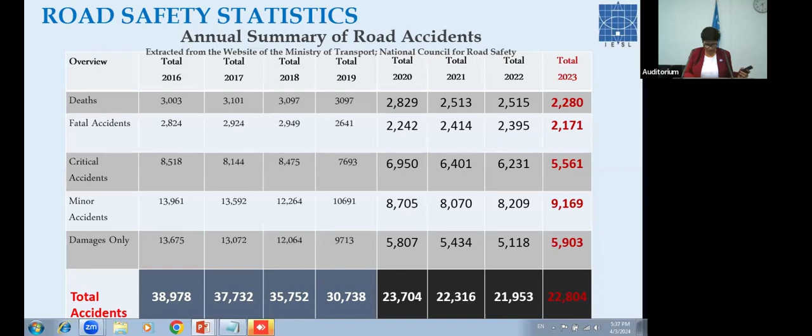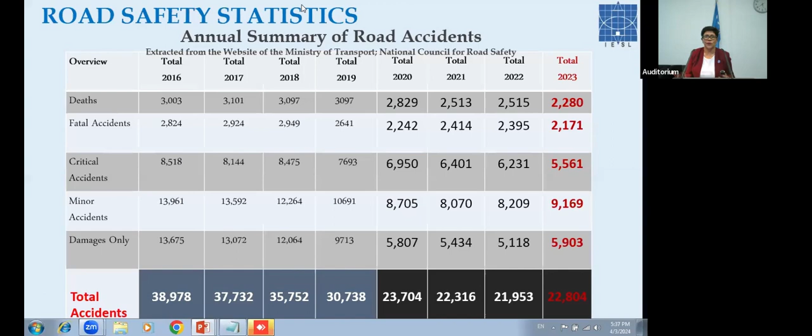And from 20 to 22, it's really because of maybe the vulnerable and the COVID and this pandemic situation. But with that, what I want to say is, still in last year, 2023, this figure has increased by another 1,000, so that is not to be expected. Sometimes I thought this credit has to go to the road users, because maybe because of their discipline, they are knowing about the road rules and their behavior patterns. I don't know why I'm doing something from here, sorry.

If I go to the next slide, you can see the number of persons killed in road accidents. That also I have taken from 2019 up to 23. You can see motorcyclists are the most vulnerable road users, those who are affected with these fatalities. And next, pedestrians and the passengers. So what I'm highlighting here is, looking at these figures, we have to make them aware of the road rules, road disciplines, and how they can adopt with those, and how to mitigate systems like reducing the accidents.

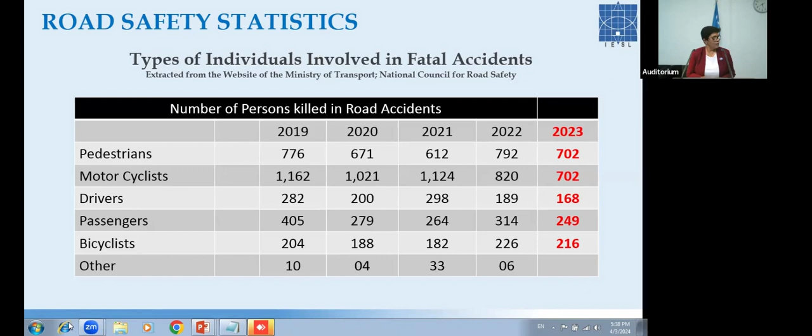I don't know what's happening. Yeah, but you go. Okay. It's like when I touch it, it's happened.

As you saw in the previous slide, motorcyclists are the most affected people. What's observed from the police and all is that it's because of speed, and sometimes crashes with the burst of tires, and mainly with carelessness, reckless driving and speed.

This is a very famous bar chart diagram in the safety area. Actually, it was shared with me by one of my friends at the World Bank. And this is a normal one as well.

You can see if a motorcycle rider doubles up his speed, what will happen? He doubles the speed, but his kinetic energy dissipated has increased fourfold. That means you understand that it's not just doubled, it's coming to fourfold.

So whatever the cause of the crash, we can see that with higher speed, you are getting trauma, and definitely there's an incident that is critical, ending with a fatality on the road.

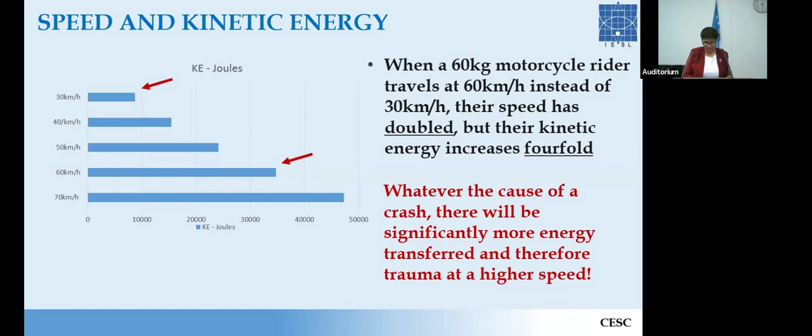We'll go from this point onward to the black spot. Before starting the theory, I'd like you to watch this. This is in Sinhala, but bear with me because I couldn't find anything in English.

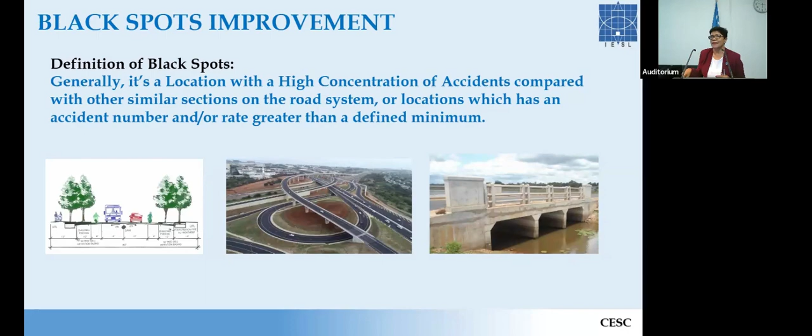Yeah, correct, but it's a location of high concentration of accidents compared with other similar sections on the road system. Not that we can consider any section, but similar sections or locations which have an accident number rate greater than a defined minimum.

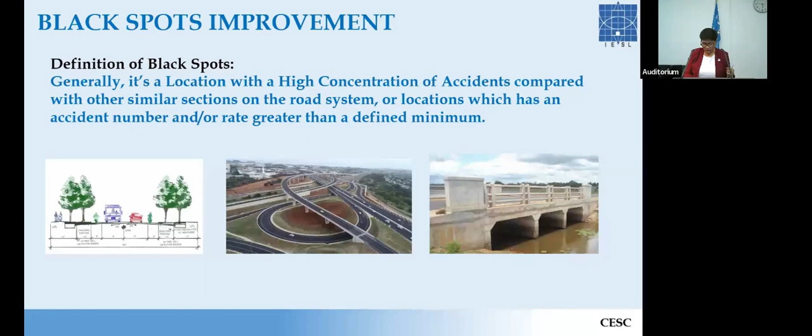As I've shown you, black spots can be identified as a road section, intersection, interchange, a structure poorly or wrongly aligned, or a local area. Those, anything can happen; in any location it can be a black spot.

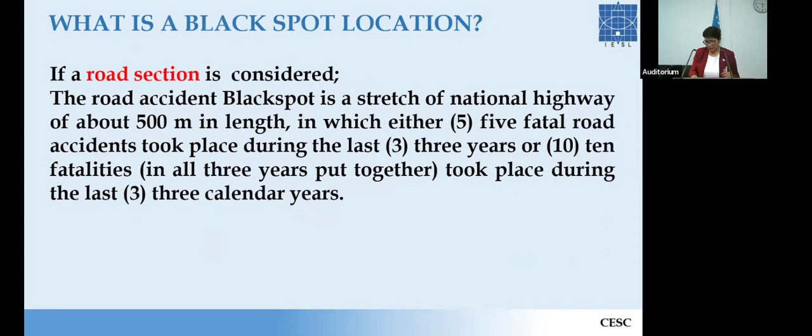In a road section, a black spot is identified as a 500 meter length of a national highway in which either 5 fatal road accidents took place during the previous 3 years, or 10 fatalities—not accidents, 10 fatalities—happened during the previous 3 years. That is the explanation given for Sri Lanka.

This again is the graphical presentation of what I just said, and the tabulated ones are here, thank you.

This first one is from New Zealand. They talk about location as a specific location, intersection or short mid-block section less than 500 meters, because being a developed country, their accident occurrences are comparatively low. The indicator, or potential black spot, they identify as 4 or more major road crashes per year over the last 3 years.

The second one is from India. They define it differently because their accidents are far more, and their section is more than 500 meters. They specify the indicator of a potential black spot as again 4, but their major road crashes per year per kilometer, during the last 3 years. That is their definition.

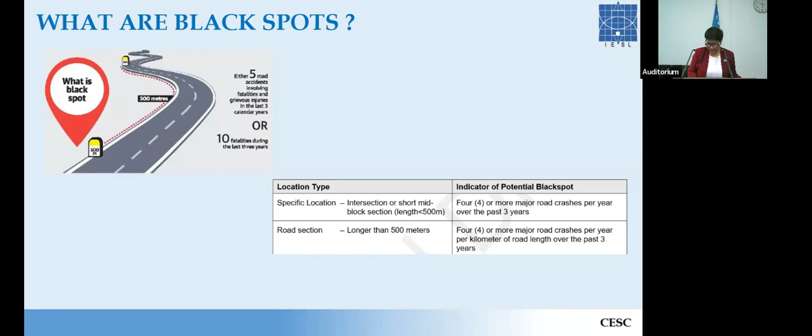I would say this black spot definition is, there is no exact one, and it depends on — you can have your own unique explanation for that, I think Asanka will agree. You can have it as your own, but it depends on the criteria, how you analyze it, and what your goals for the analysis are. That depends on criteria — your number of accidents and the specification can vary.

I'm going to show the black spot process involvement. A crash happens, police come and get their records, do the recording, and those records go to the web database, where they analyze and extract the data.

This is the major part: diagnosis of the individual sites, analyzing and investigating, and preparing the black spot or road black spot improvement reports. Then we submit it to the agencies where funding is approved and released, so we have to find some funds.

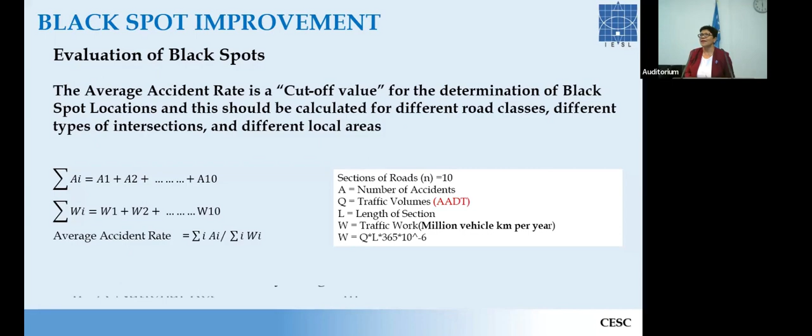In this equation I have taken 10 locations, 10 road sections, and the traffic work of those 10 locations - sigma value. Sigma of accidents divided by sigma of work volume gives you the average accident rate.

When we analyze traffic accident locations, first this is for road classes - a format developed for this. Road classes, as RDA and other road authorities have nominated, are type A, type B, district classes, and so on. For that we have to consider built-up area and non-built-up area, and calculate average accident rates separately, otherwise that figure won't be a fair representation of the accident.

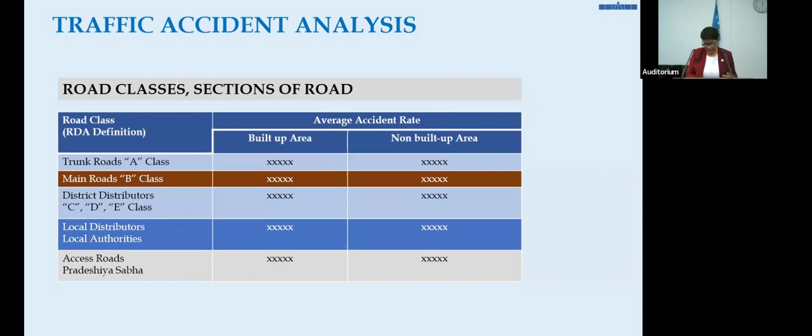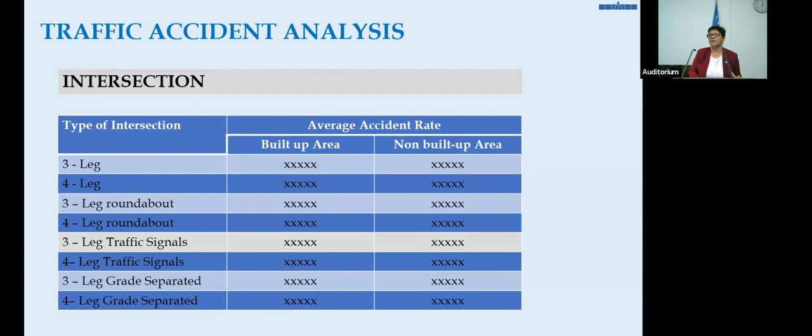The same applies for intersections. There are several types: 3-leg, 4-leg, 3-leg roundabout, 3-leg and 4-leg traffic signals, several types of intersection. For these too, we separate built-up and non-built-up areas and calculate the average accident rate, which lets us check how the location behaves.

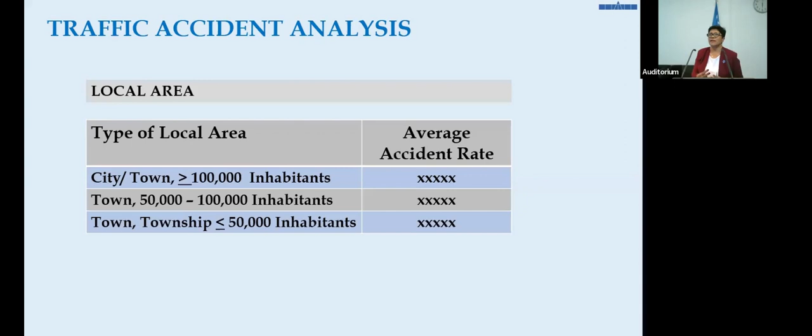For a local area, we go by the congestion, meaning the number of inhabitants, and the average accident rate can also be calculated. The congestion and complexity of the area is decided by this. Maybe we can increase this scenario for about 150,000, but that we cannot do. After investigations only, we can categorize more than 100,000, 50 to 100,000, and less than that.

This is the method, and this is the methodology. After investigating and identifying, we will have to know what we are going to do. As with any building site or construction of a bridge, after getting approval of the designs, we go to the site, do investigations and inspections before setting out, and then we do our construction as well.

The same theory applies here. Once we do site investigations, designs for a black spot are made, but before that, for small locations we don't have sophisticated designs. We have to improve then and there. This is mainly for such locations. We have to investigate, go to the site, and we can have our own methodology to do it.

Before this, I think it's better to explain what we are going to do after going to the site. Normally what we do as engineers, when we go to the site, what do we do?

We do a sketch. This is a specific sketch, but what I'm trying to say is we do a sketch, we observe the area, we get photographs, we go around, we can drive about 1 kilometer, because this is especially for accident-prone locations we are investigating.

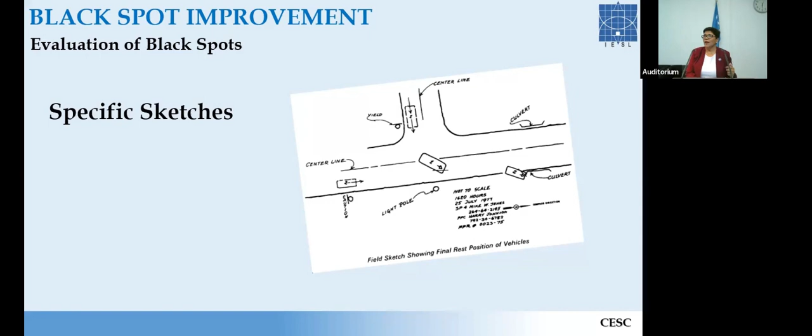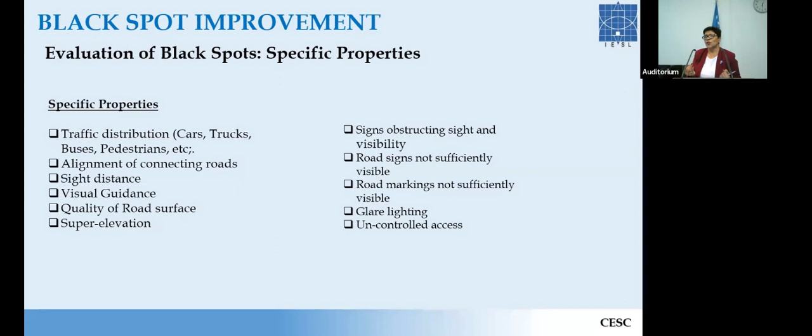We should know these things when we are doing it, not only the sketch but also traffic distribution. This is the 5 circles I mentioned, I don't have to repeat.

After doing all these things, we can have a checklist, because writing it somewhere doesn't come out clearly. This is a checklist developed for pedestrian accidents in ribbon development areas. I think you all know what ribbon development means—they develop any place with no proper design, no plan, nothing, but they develop it. It's required and we appreciate it; if you provide a 100-meter footwalk, we are happy.

If they provide us some money, and some money comes in for a traffic signal and a crossing, we like it. But in a ribbon development area, the most vulnerable people are the pedestrians. So this checklist is for that.

We have to check first whether the pedestrian footway is accommodated, and whether it is adequate enough. That mother-child concept—1.2 meters at least we should have for the footway, or center median at least 1.5 meters we should have, something like that. So these design ideas may give a better idea during the interaction time.

With the market stalls, people are normally going on the road, and food trucks are there for the vendors because they are thinking that way in so many areas we have seen. These things should be maintained properly somehow, and pedestrians should not be forced onto the road.

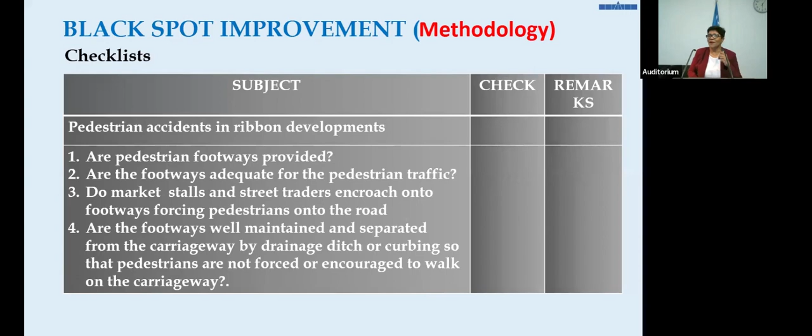If there is a footway, definitely we should have it raised, with raised curbs used. If not accommodated with that, even a cover slab will do—we have to cover the drains with slabs so people can use it. That is a normal local method that has been used, but we don't have to encourage that method.

Now this is another improvement measure we can apply: we can do conflict studies. This is a very serious area, and I will just show you the definition of this.

For an accident, there should be at least two parties, but can be having many more. When two road users are approaching each other, this conflict situation is when they should have collided but could not prevent that situation, meaning none of the road users reacted with an avoiding maneuver. That is the conflict study definition.

If I elaborate it further, it will be misinterpreted, so this is the way. Actually, you get a very sophisticated format, but I have not put it here because there's no point just putting that.

Every behavior of the road user, driver, pedestrian, or whoever is involved in this incident, their behaviors are marked, road spaces are marked, road properties are marked. So these two sentences are exactly correct, substitute and complement to accident analysis. With that form, we can have a lot of good data and basis for the identification of remedial measures. We can identify what we need there, how to remedy it, and this is the procedure.

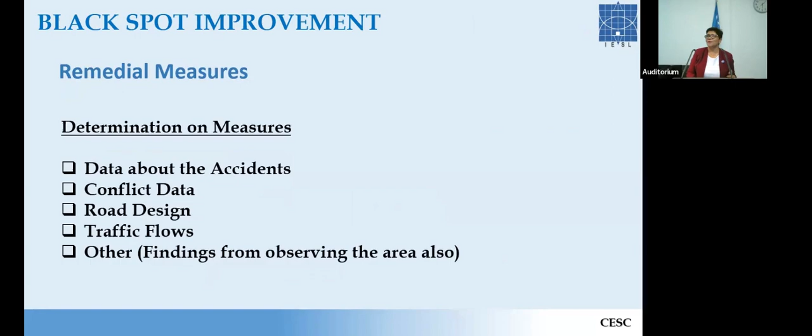Actually, rumble strips are not a new thing, but when this started, we were involved in it. At the inception, rumble strips were made from asphalt material with a thickness of 10 millimeters. This 10 millimeter rumble strip on a road, with the same width of 150 millimeters and a gap of 150, was really not comfortable for road users.

So with a lot of discussions and experiments, it has come to the global method. This is the normal international procedure also, thermoplastic. The thermoplastic one has ended up with a 5 millimeter thickness. Now I think 5 to 6 millimeter is the maximum thickness of rumble strips.

If we introduce rumble strips, definitely we have to have a warning board ahead, in front. There is something like that. Even for road humps next, it's also the same, we have to mention them ahead.

As I said, when we introduce these remedial measures like rumble strips, sometimes the accident happens in the daytime, and we don't have to recommend street lights for the night, because we have very limited funds in any country, that is the scenario. We don't have much money allocated for road safety still in a lot of countries. So if you use that money for some other purpose instead of improving the black spots, road safety is not taken well. So we have to identify the appropriate solution for road safety improvement, black spot improvement.

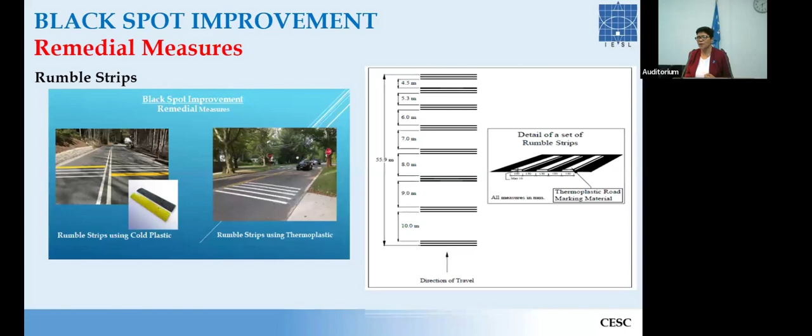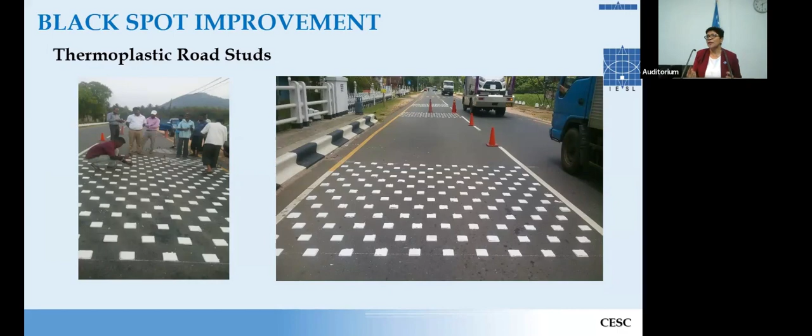Instead of rumble strips, I got this from one of our RDA engineers in the Northeastern area. You may be knowing it because they are using thermoplastic road studs. I think this is going well rather than strips in some places. And now they are looking at developing this, they will be continuing with the same rumble strip scenario.

And this is the sonic nap alert pattern. These are mainly used in expressways.

I have a small story with this. When we handed over the Kerawalapitiya section to the client, this introduction of the sonic nap alert pattern came, and they tried that section. We were working outside after handing over, and we had a lot of work to finalize. We heard a crash, a very loud sound. When we came up, people had gotten out of the car and were checking their tires, and then we realized they misunderstood it as a tire blast or something like that. Because of this sonic nap alert system, what you get is noise, not mainly the vibration, but the sound. So we clapped for them and told them this is because of that, so you can move on. At the beginning those things were happening, but now I think people are aware and we don't go into that confusion anymore.

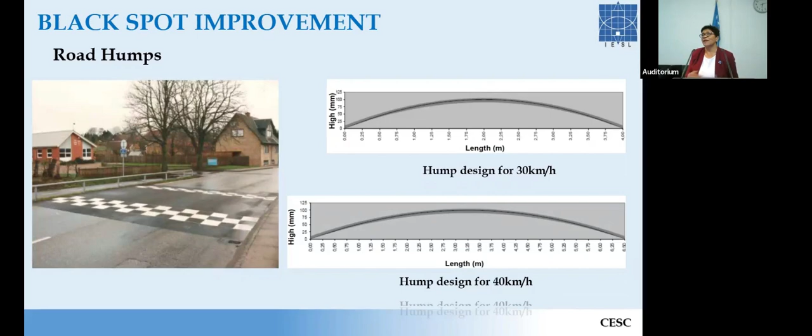This is a road hump, from a European country. It's a pillow hump, its thickness is gradual. This is for a scheme or a housing village, but these things are normally identified. In Sri Lanka, we don't allow humps, but in other countries, even India, they have included some sort of humps on the expressways too, just for your information.

You will think about whether pedestrian crossing is a road safety measure.

My concern here is where to produce this road crossing, because we produce this to cross pedestrians, and this should be used by all the pedestrians in one location. You can be channelized through that.

When we choose a location for pedestrian crossings, normally we walk here and there on the stretch to find out the appropriate location. At the same time, about traffic signs, we have to introduce information and warning board signs and no parking or standing signs. At the same time, for markings, we have to have hazard lines definitely with zebra yellow lines, because none of the vehicles can move over that. So that is very important.

The road crossing is a very good, effective traffic safety measure. At the same time, I have noticed now you are introducing a diamond shaped road marking, and people take good care of it. Once they see this diamond mark, they know there is a tendency to slow down as well. So it's a good introduction that RDA has done recently.

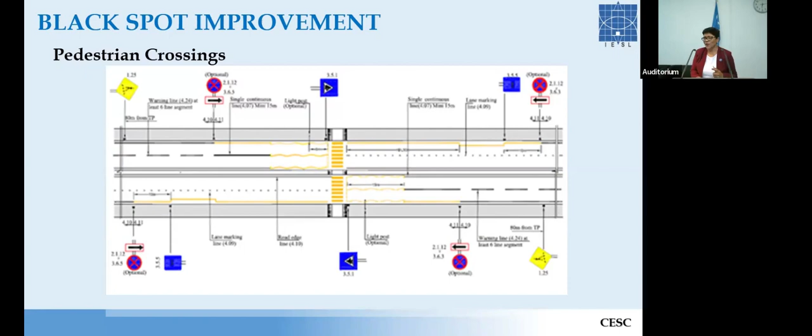Actually, what we do here is mainly address the high-speed characteristic of a driver. The high-speed person definitely will slow down at the roundabout, and then pick up speed and go out. So roundabouts are normally introduced in an area where the density of traffic, both vehicles and pedestrians, is high. When there are more pedestrians, this is more appropriate, because on all four legs we can have pedestrian crossings, and we can streamline and direct them where to cross. So this is a good mechanism.

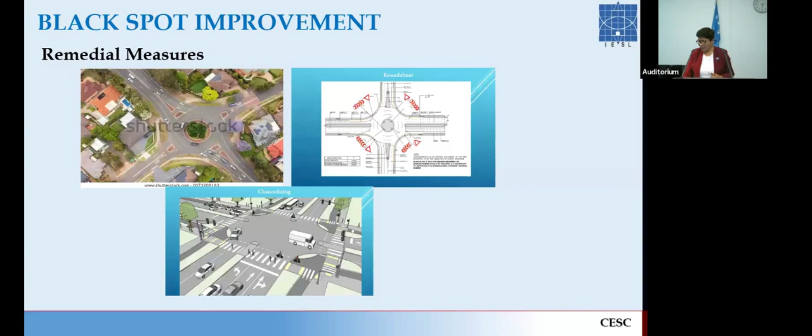And the next one is a design thing, channelization. This is of course very popular, even in Sri Lanka. When you go straight or when you want to turn, you don't have to be panicking. You have separate lanes you can go in.

But you should understand that you have to decide early when you approach the junction or where you are turning. You have to be careful about the police, because they will assign you a ticket. So you have to decide at the beginning before entering into this zone.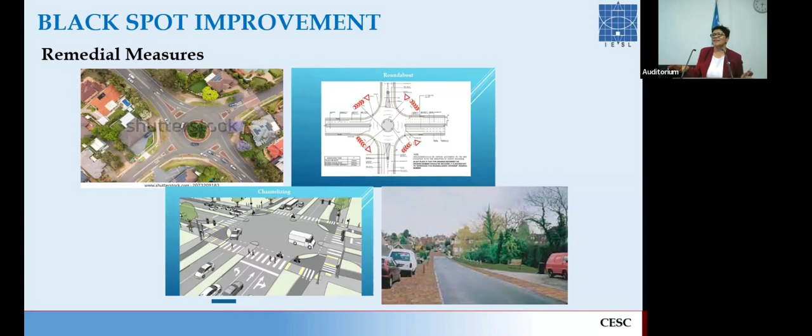And this one is a psychological traffic calming method, because we all know the road should be black. So the road is black, and your pedestrian footway is in another color and texture. This is how I put it.

I think psychologically there is a good feeling, not congested. Also providing center medians, those things are some of the improvements for these traffic calming systems, and mini roundabouts. I think Mr. Denzil was a pioneer, and always when you go to a site for a black spot, for remedial measure introduction, he comes with a mini roundabout, always a mini roundabout. So I have to mention it here for you.

I think road safety is a vast area, I can't cover everything here, but this is another thing. You have to consider traffic signs, road markings, all the road furniture, parking control, parking provisions, and reflective roadside delineators, pavement markers, reflective ones should be considered as well.

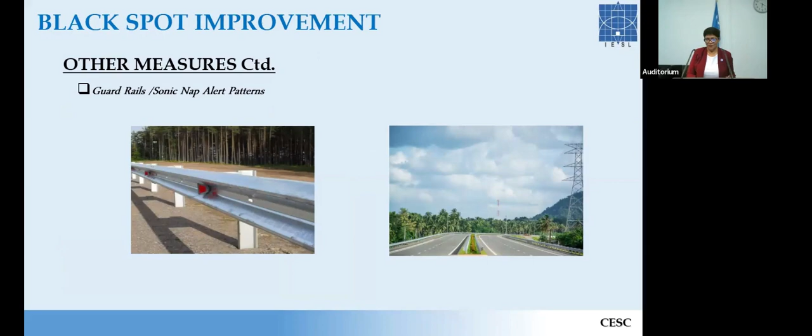We have to understand that reflective pavement markers are the most prominent things, and also some other road furniture like guardrails. You can see this expressway is nicely provided with guardrails - safety is there. These concrete barriers and safety fences, we are providing to separate the carriageway directions mainly.

Pedestrian bridges, overpasses, underpasses - we separate pedestrians from fast moving traffic. Staggered junctions are another good option - we don't cross directly, we take some distance on the road and then move.

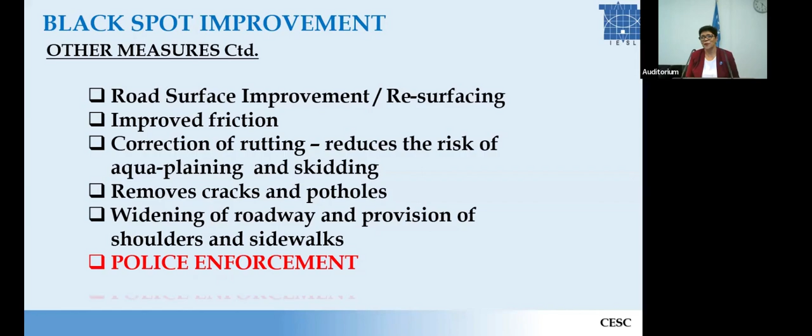These things are also very important - road surface improvement, correction of rutting, which is very important because during rain, aquaplaning takes place and skidding happens. Other things also include widening of the road surface to provide shoulders, not only on expressways. And the other main thing is how people in Asian countries behave with police enforcement - that should also be there.

We can prioritize remedial measures, frankly based on cost effectiveness. That's valid for everything. We have to consider that when we implement, there will be problems - social problems, political problems, funding problems, and some negative side effects people may see. So we can get all the ideas from the public, close-by people, all the stakeholders, and share that knowledge.

This is from New Zealand, not Sri Lanka, but you can see this is an improved section of a black spot, a small section. You can see the difference - they have provided road marking, and the guardrail which was damaged, they have provided that.

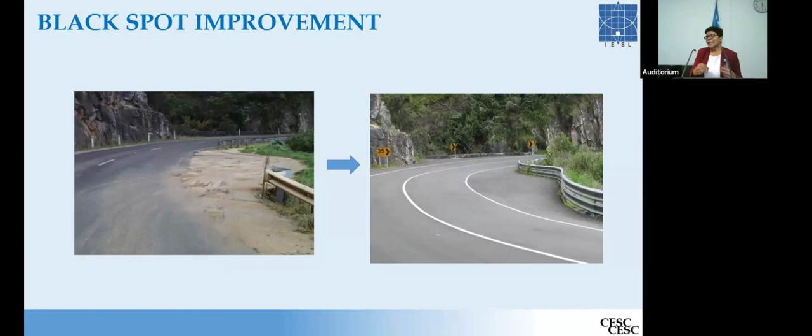Instead of roadside delineators, we have put chevron markers. One more improvement I suggested to my friend - why not put cat's eyes on the center line, because that would be very clear at night and give a good guideline to drive.

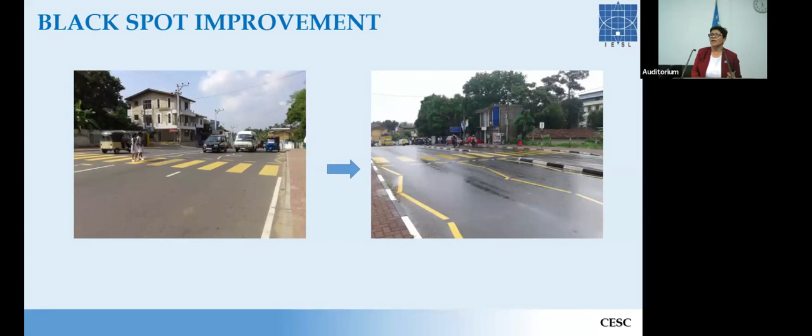This is from Sri Lanka, I got it from our dear friends. Some improvement with this center median - they have raised it, and the zebra lines are provided along with the edge line.

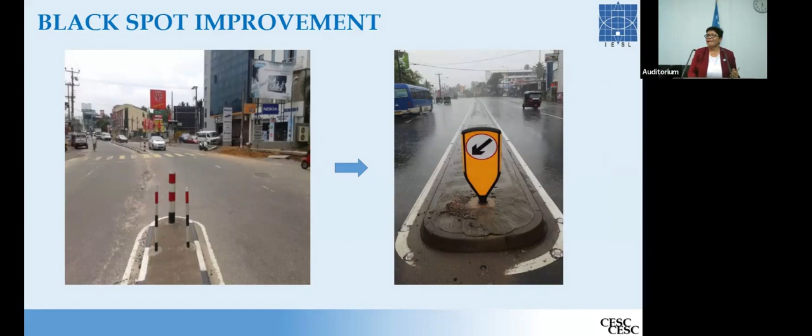With the black spot discussion done, I will give you some tips on being a responsible road user. Be visible on the road - wear your jackets, some transparent or visible, reflective ones, whether you are a pedestrian, cyclist or driver. Your vehicle can have daylights on, as in a country like Sweden and some other dark countries.

You can improve the visibility, and focus on one thing at a time. Don't text and drive, don't text and walk, because your concentration should be on what you are doing. This is actually being considerate about others, not only you, because your mistake will affect another one's life. So we have to think that way.

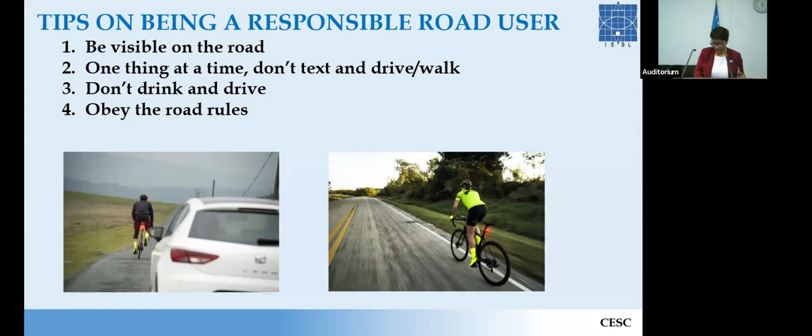So you show your intentions early, you wear your PPE. All the road rules are for us. So with that, I think I can complete. As a final remark, you should know when you get onto the road what we are doing. As a driver, as a passenger, as a pedestrian, we should be very much considerate about the others. I think I can finish it. I have some more, but I think time is up, so it's okay.